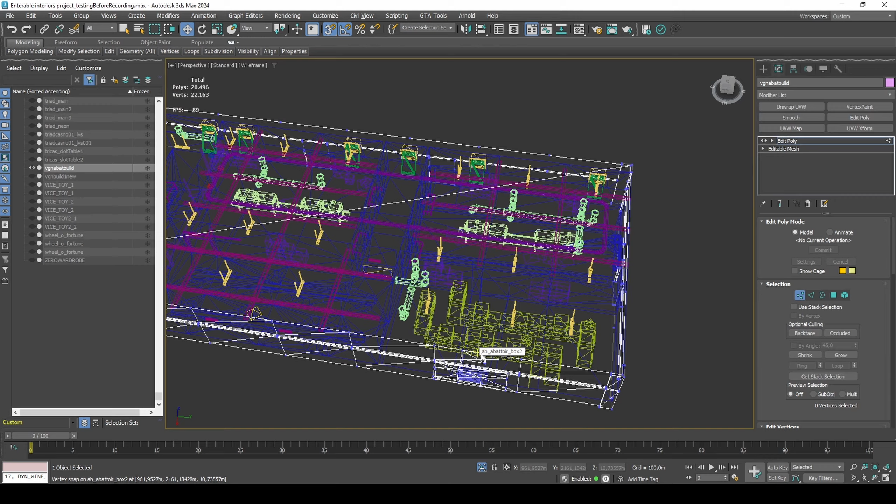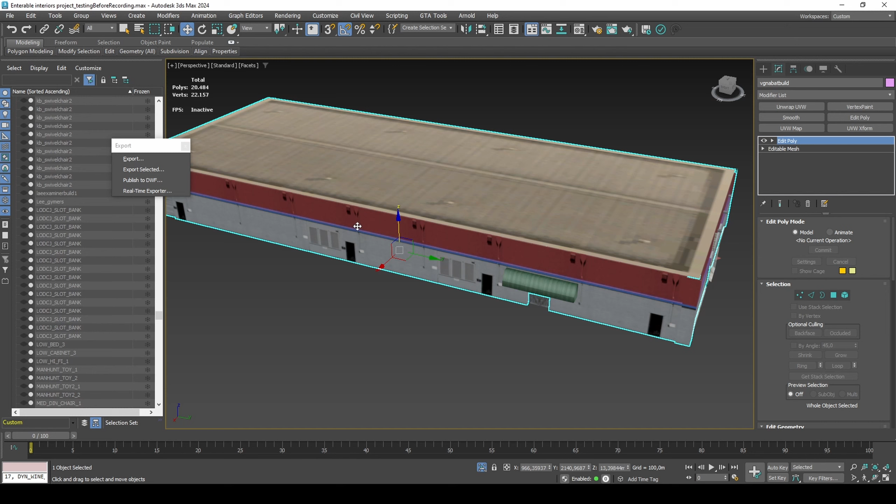Add edit poly and delete the exterior entry box. Export the exterior DFF. Export the interior DFF.

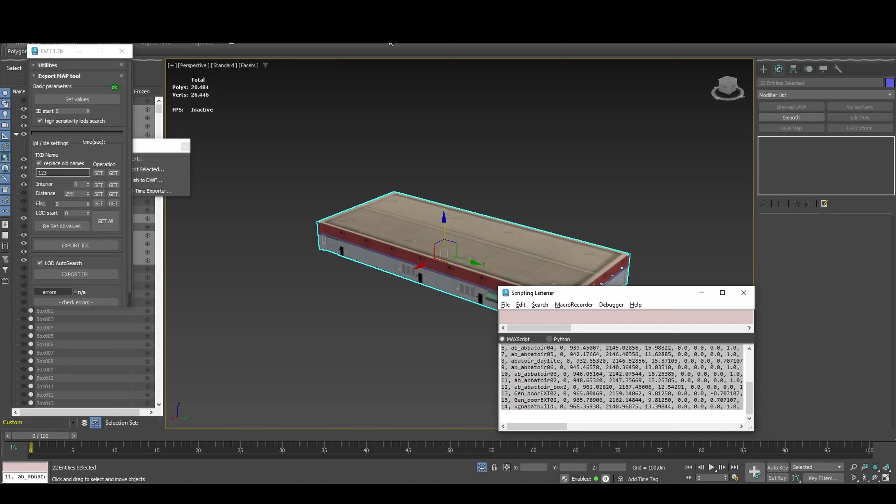Select everything and export to IPL. In the IPL, change the door to Gen_doorEXT03 and to ID 1491. The incorrect IDs will be fixed automatically later in this video.

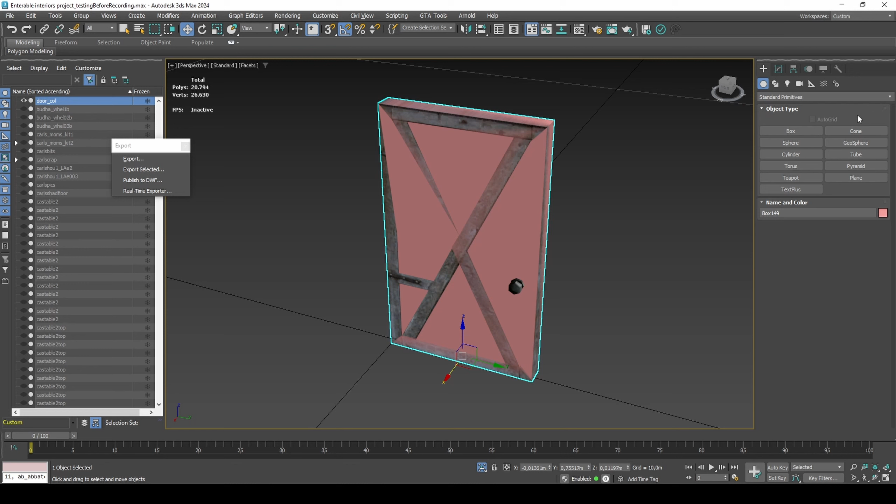Copy and move the door to 000 and clear out the rotations. Create a box around the door and name it door_col and two spheres that intersect the right side of the door, which is the side that the player needs to hit for the door to open. I made them 0.42 in radius.

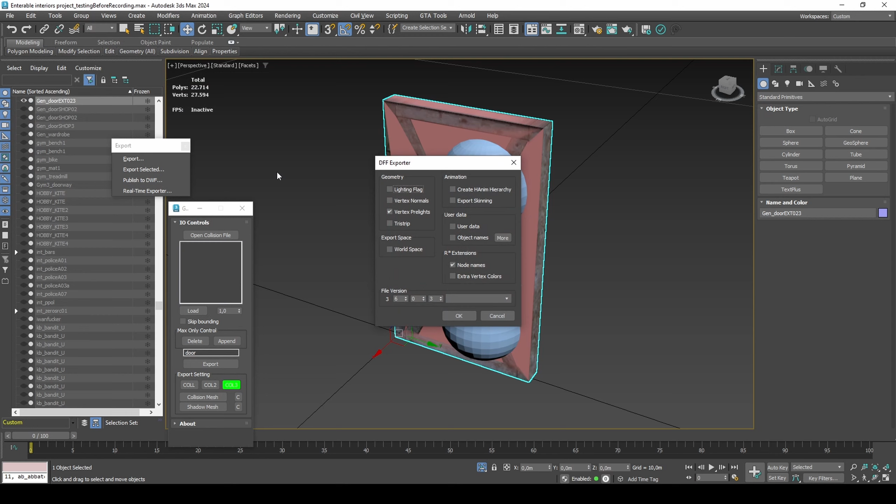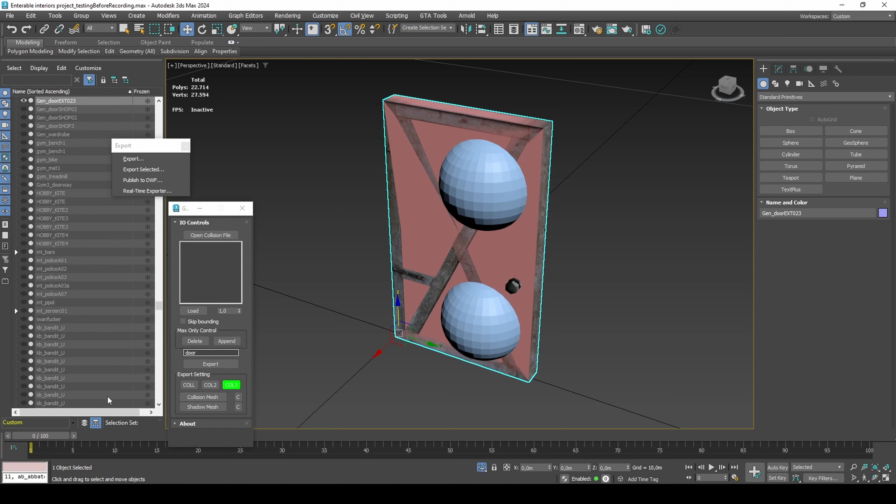Export collision. Export DFF. The door is meant to replace ID 1491. Set up the TXD by creating a copy of ext_doors2.txd from GTA3.img and deleting the unused textures.

In Scene Explorer, click Layers. Select and isolate vgnabatbuild_col, as well as duplicating the DFF and moving it to the collision for reference.

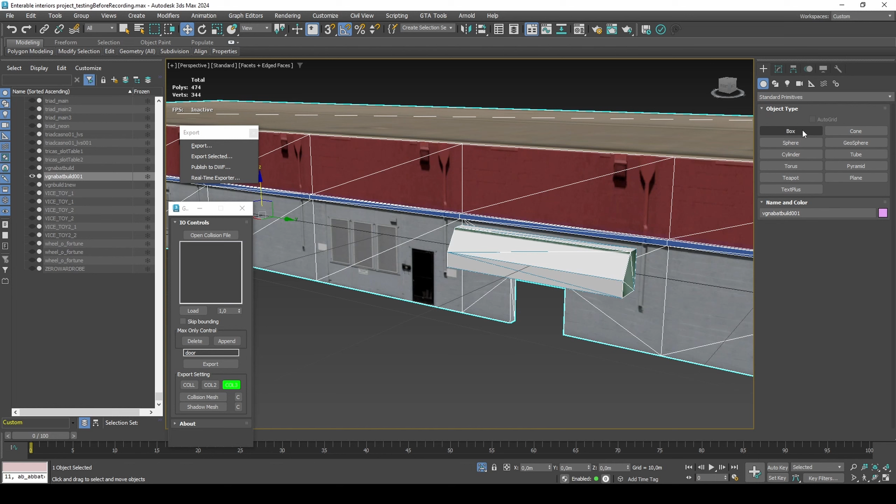Set the collision layer as active layer. Remove the primitive boxes as they clip through the interior. Start creating basic boxes to shape out the collision for the exterior.

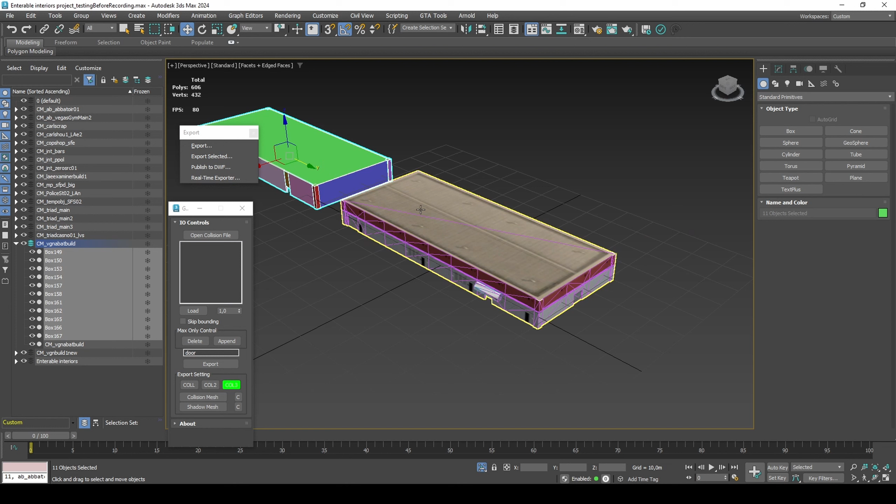Export exterior collision along with its primitive boxes. End isolate. Set ab_abbatoir01 col as active layer and isolate its contents. Add edit poly and remove isolated vertices.

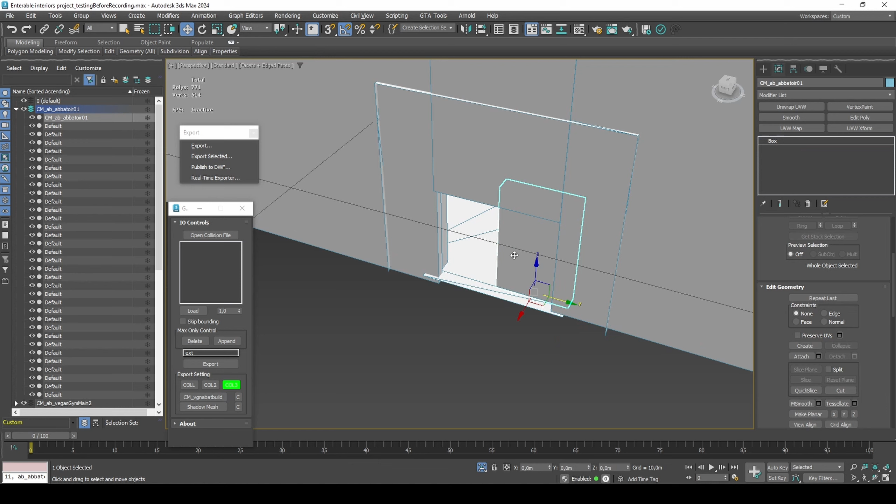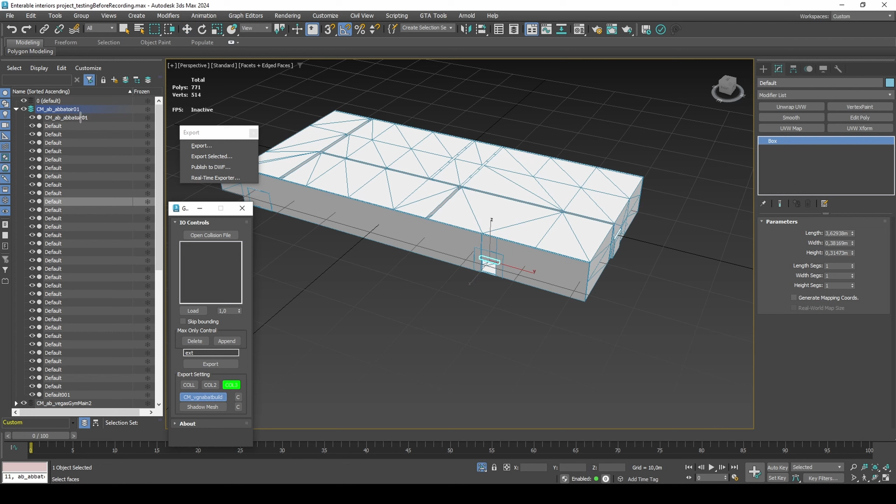Remove the interior entry box. Remove the box that blocks the other door. Clone and align the other box and snap to the other side of the door frame. Export interior collision along with its primitive boxes.

Convert the IPL map to Lua map so that it can be loaded on MTA. Add the following code to the Lua script to remove the original object and its LOD from the map.